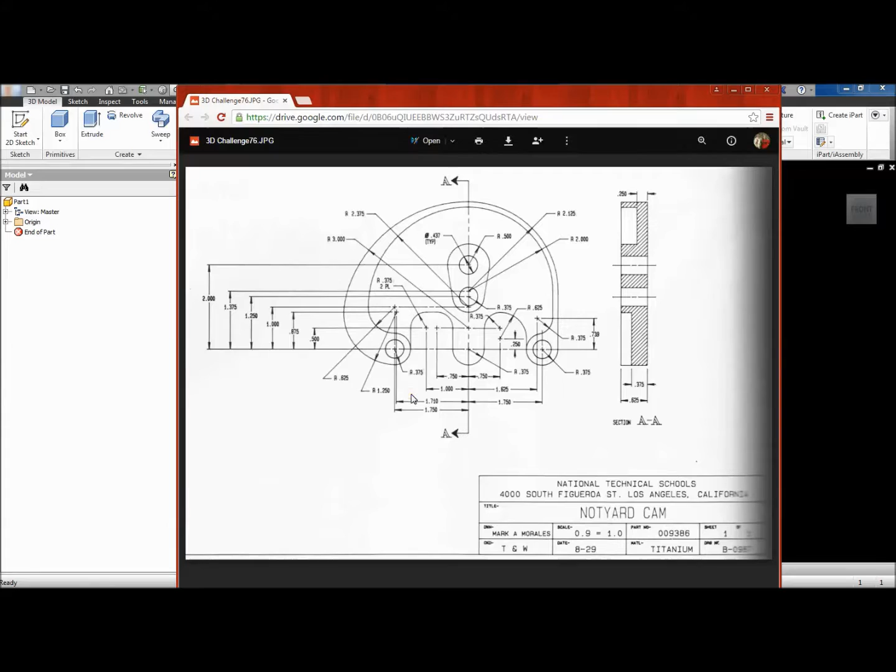Hi, Tom Andreas here. Some of you have been having just a little bit of trouble with this particular part. It's the cam, and it is, I believe, part 76. And so with this particular part, it presents a little bit of a challenge, but not really a different challenge than any other part. The main problem that people struggle with is what's the base feature?

And as you look at the cam, what you can see is that the base feature is, and I would select the base feature, which would be the back side of this cam. So it's actually a little bit confusing for you to figure out what that should be. If you were to try to recreate all of the geometry, it would be really unusable.

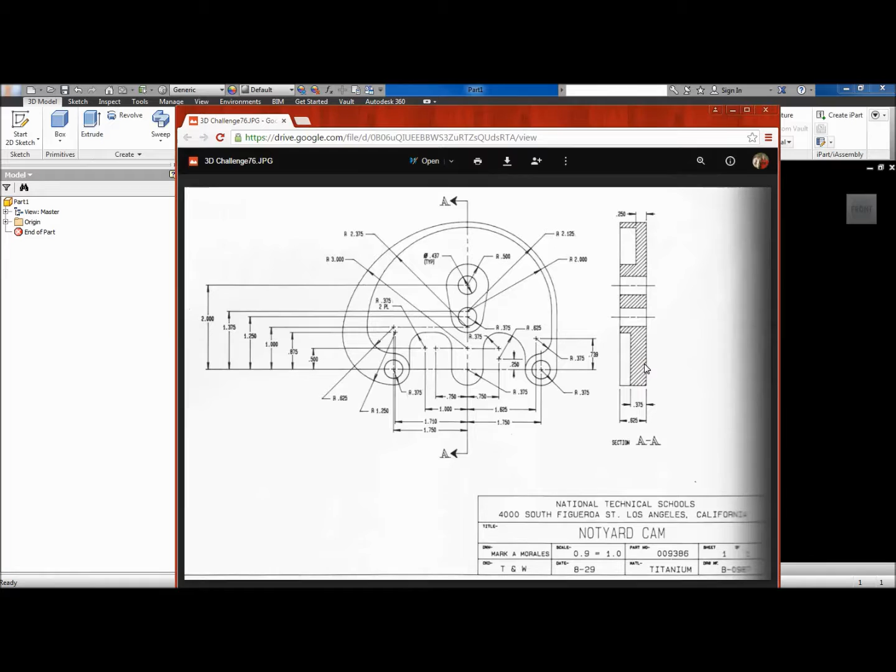And so the best thing to do is to look at the base feature from the back side and imagine what that looks like. And so at this point I will cut away and I will create the base feature sketch.

Okay, so now what I have is all of the geometry that goes with this part, with the cam. And so you can see that if you look at what we're trying to do here, which is to create the base feature, or the feature upon which we're going to construct other geometry and other features, this is what the back of the part actually looks like. It does not have any of this internal geometry that we will actually build and extrude next. And so this is where we want to go next.

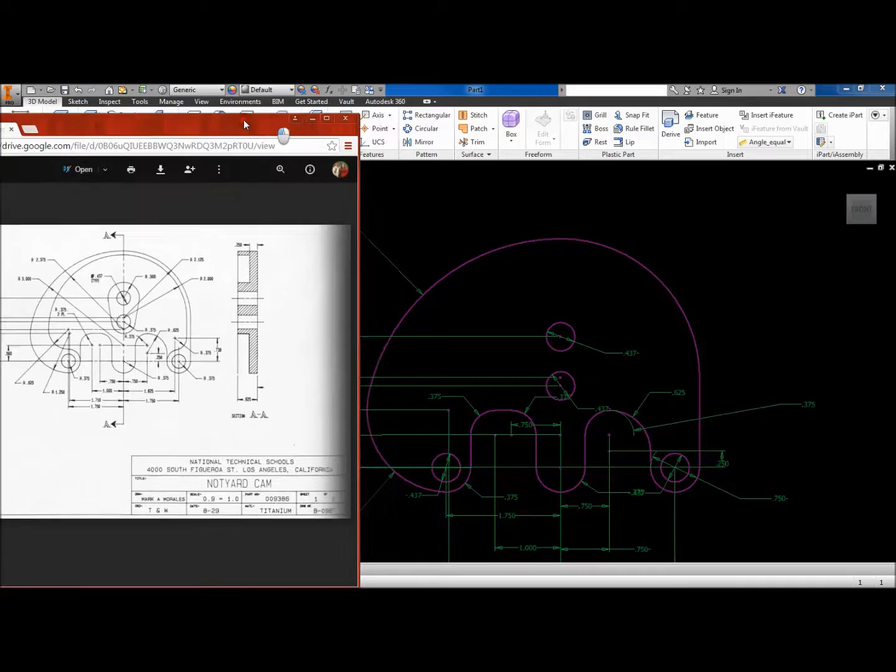So at this point, what I will do is go ahead and I'll just rotate this just a little bit so we can see it, and then I'll tap E for extrude, and I want to extrude it. And so if you look at the thickness here of this base feature, which is this part here, which is section AA, I might add.

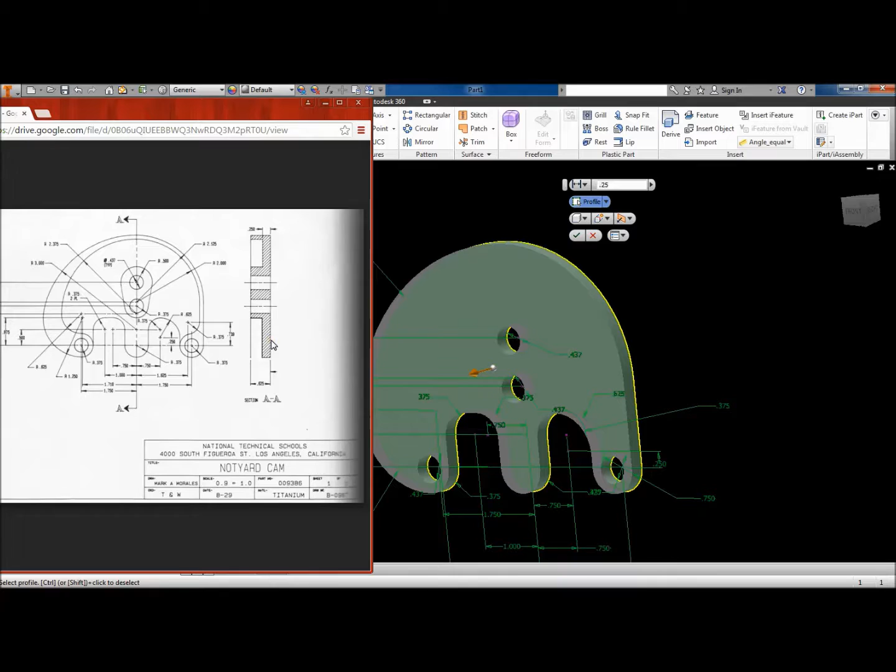So when you look at a section, if you look at an A here and an A here, if you were to cut that right in half and look at the side of it, this would be the section side view or the cutaway of AA. So you can see that the thickness of the base feature is 0.25 inches. So I already have it, and I can now hit the check mark.

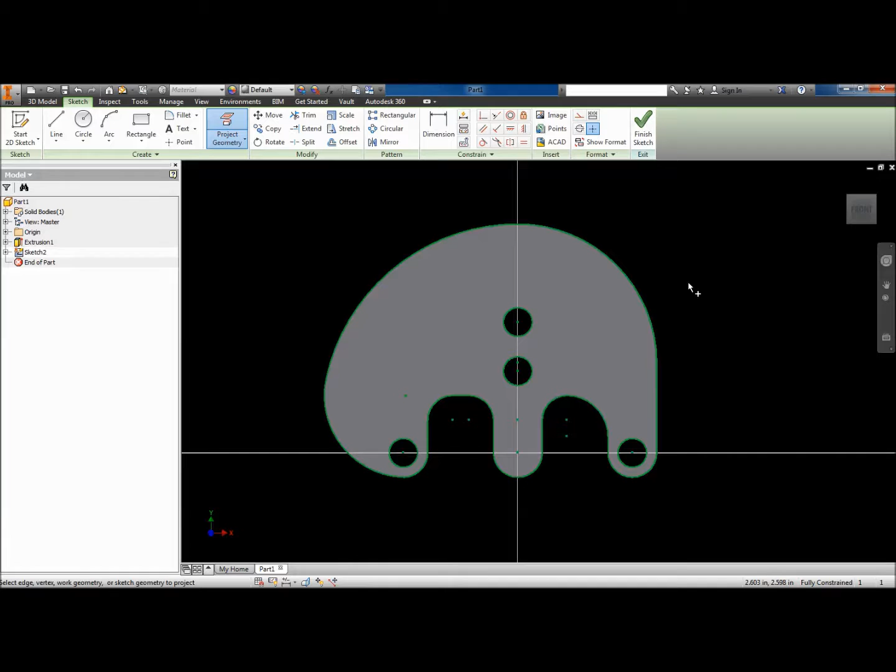So at this point, what we can do is to create a new sketch here, and now we want to use that very powerful project geometry tool. And so I've just projected all of the geometry, and that will make things much easier for me as I break away and put the next geometry on this sketch that we need to make the final extrusion.

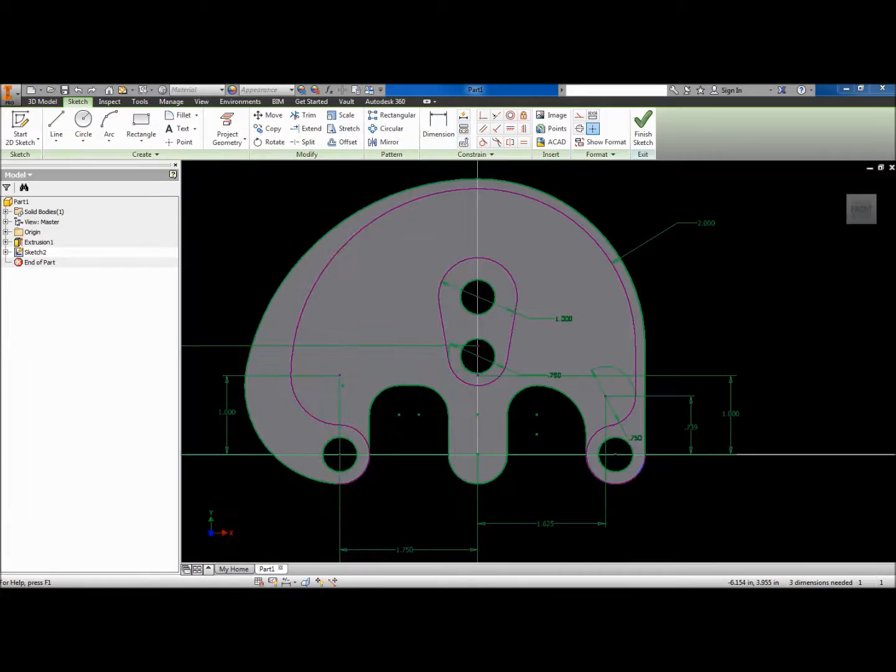Okay, so what you can see now is that the rest of the geometry for this cam has been put into place. And so what that does is to create a situation where we can go ahead and extrude off of the base feature. So I'll go ahead and finish sketch, and I will come in here and hit E for extrude, and I can shift select, so I'm gonna click to hold and then shift and click. And so I've got both of those surfaces.

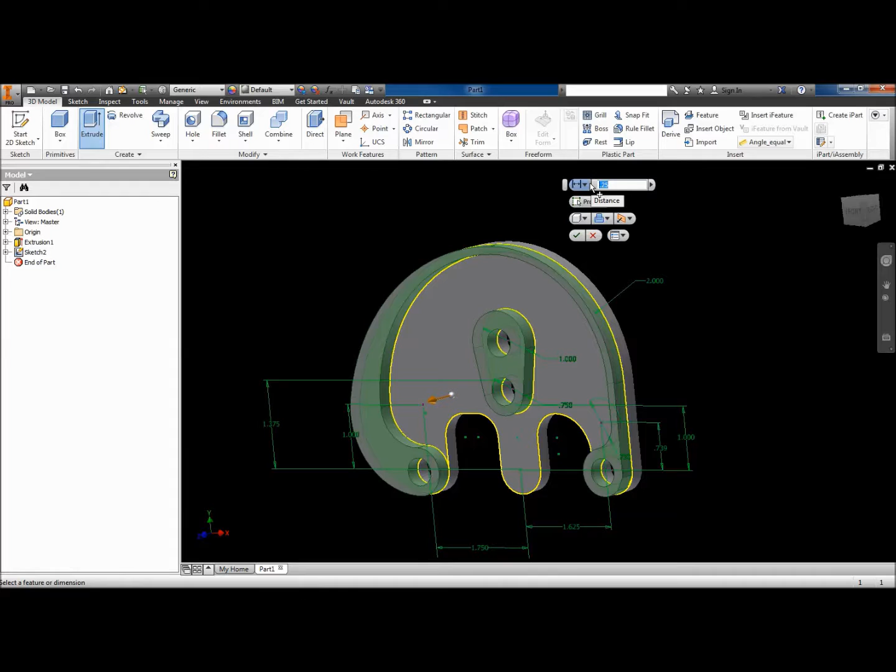Now, the actual extrusion for the part is 0.625 minus 0.25, which is 0.375. So there is our finished cam. Okay, so here is our base feature. We started with the back, and we'll go ahead and rotate it around so that we can see the front.

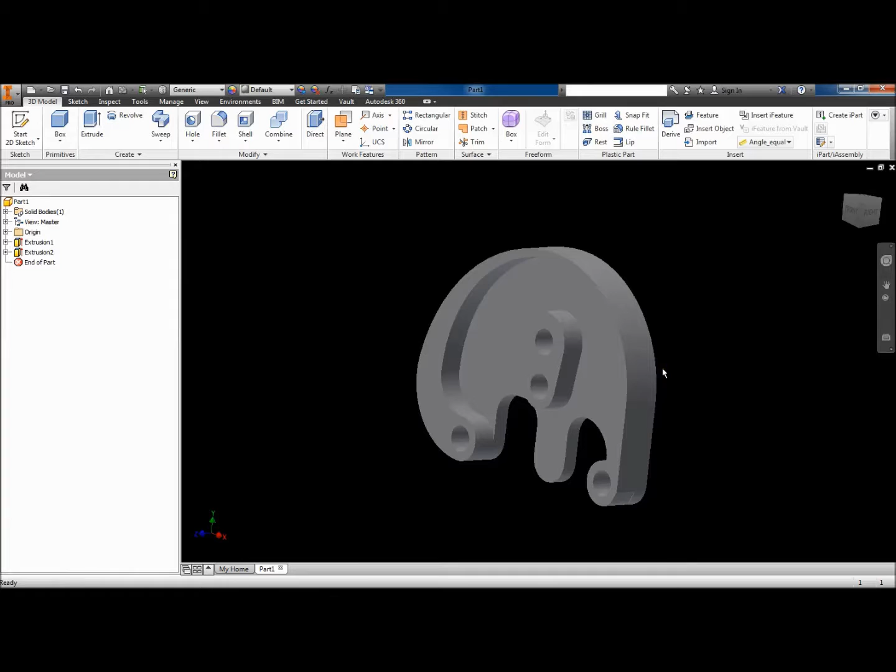So I hope that helps you understand. And just to review, the first process that we want in any part is to determine what the base feature is. And again, I think the best way to approach a part like this is to go ahead and select this as the base feature, and then to extrude the second thickness. Okay, I hope that helps.